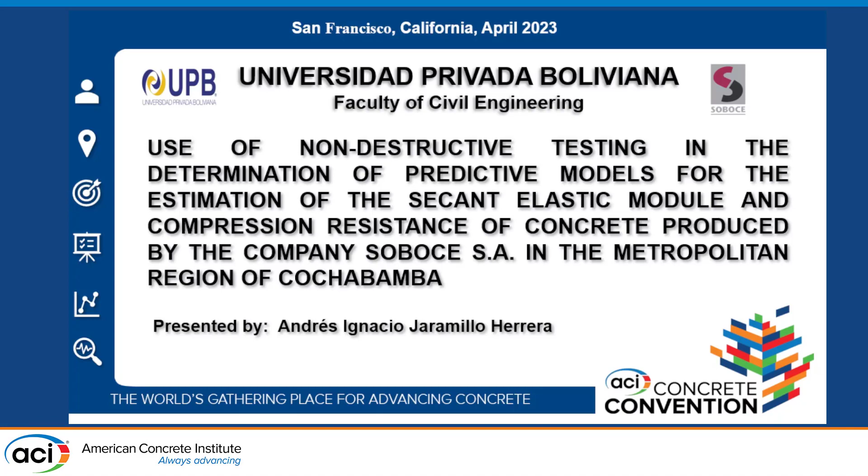Good morning, everyone, and welcome to the presentation of use of non-destructive testing in the determination of predictive models for the estimation of the secant elastic module and compression resistance of concrete produced by the company SOBOCE.SA in the Metropolitan region of Cochabamba. Before continuing, I want to introduce myself to the audience present this day.

My name is Andrés Ignacio Jaramillo Herrera. I was born in a city located in the south of Bolivia called Tarija in 1998. I am currently 24 years old. I am a research student at Bolivian Private University. I am also a technical advisory intern at the company SOBOCE.SA. My main goal as a civil engineer is to get a master's degree in structural engineering. Five qualities I can describe myself with are: I am very positive, disciplined, confident, hardworking, and a fair person.

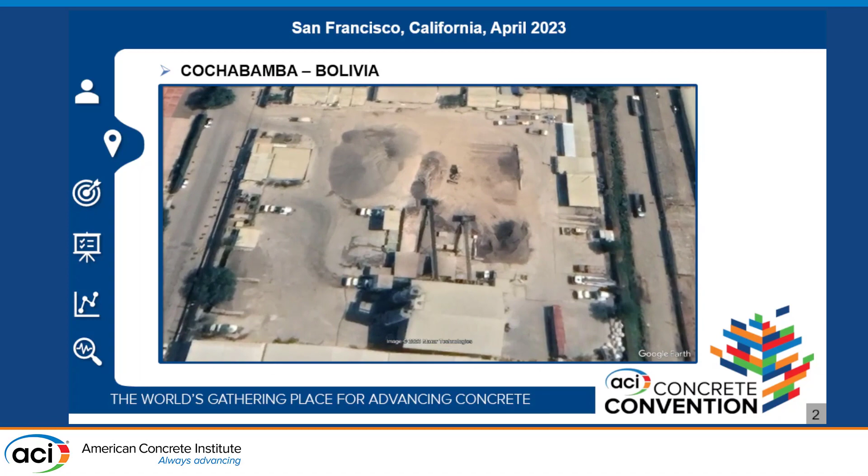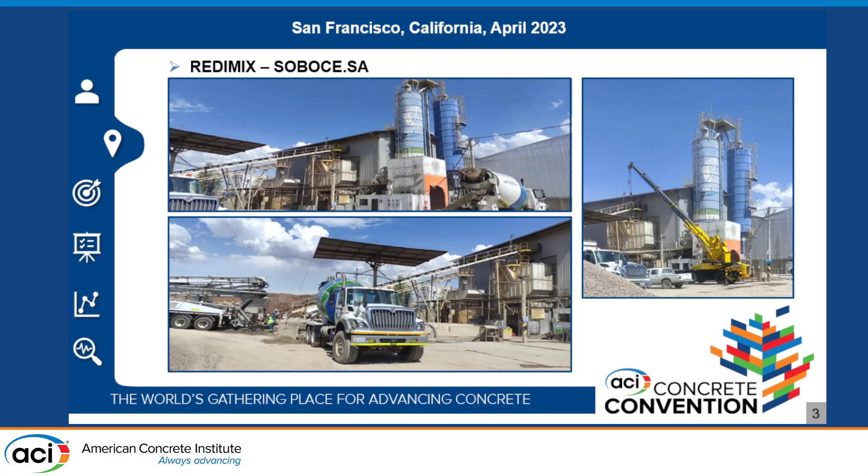The research project was developed in two places in Cochabamba, Bolivia. The first place was in the ready-mix SOBOCE.SA concrete production plant that you can see here. Part of the research was also carried out in Bolivian Private University. Here you have some photographs of the ready-mix SOBOCE.SA concrete production plant and the Bolivian Private University.

The general objective of this research can be presented as: determine regression models that help estimate the secant elastic modulus and compressive strength of concrete produced by the company SOBOCE.SA in the Metropolitan region of Cochabamba, with stone aggregates from alluvial banks of the Parotani River and Viacha brand IP40 cement, through the application of non-destructive testing methods in concrete.

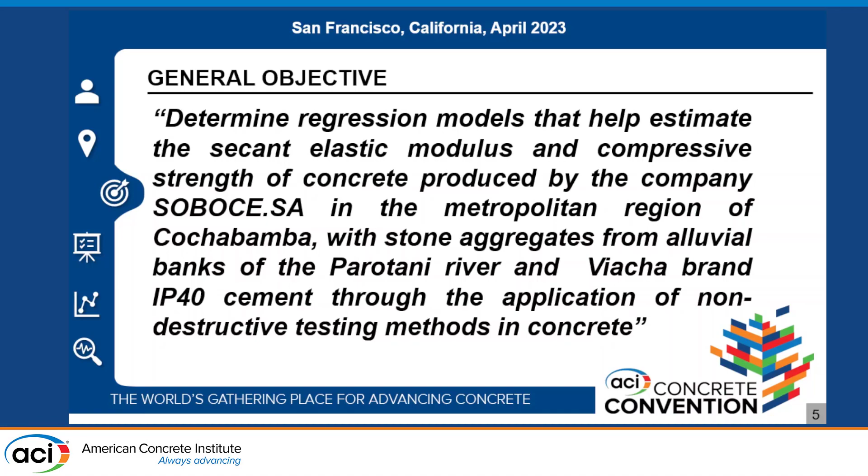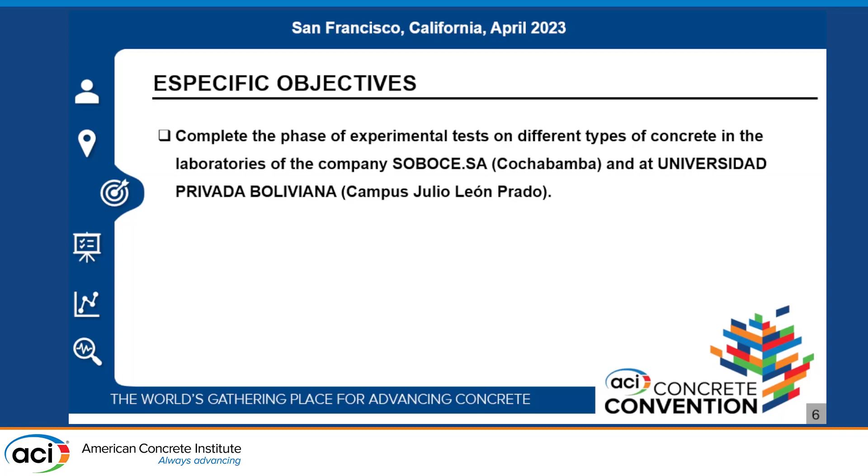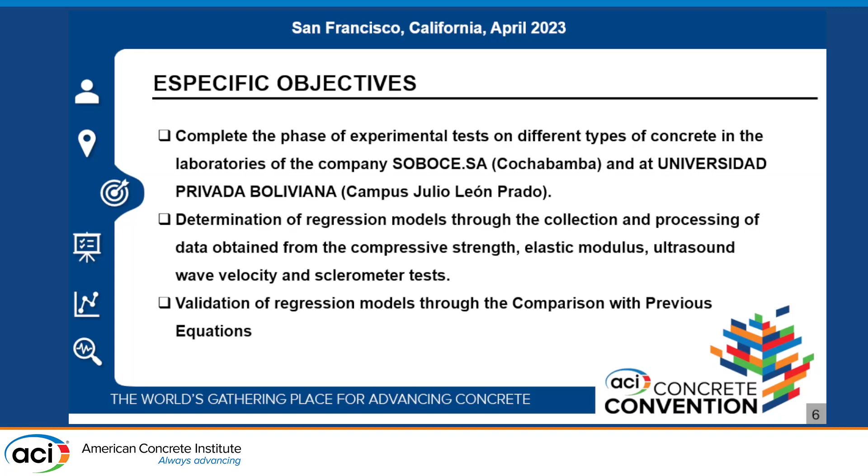The specific objectives can be presented as: complete the phase of experimental tests on different types of concrete in the laboratories of the company SOBOCE.SA Cochabamba and at the Universidad Privada Boliviana; determination of regression models through the collection and processing of data obtained from the compressive strength, elastic modulus, ultrasound wave velocity, and Sclerometer test; and finally, the validation of regression models through comparison with previous equations.

The test methodology implemented consisted first of all in four parts: identification of variables to study, compressive strength, ultrasonic pulse velocity, rebound index hammer, and modulus of elasticity.

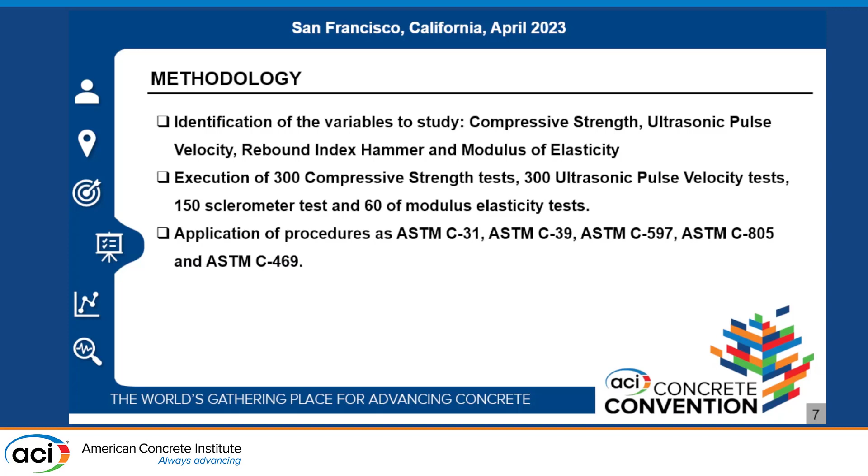Execution of 300 compressive strength tests, 300 ultrasonic pulse velocity tests, 150 Sclerometer tests, and 60 modulus of elasticity tests. Application of procedures such as ASTM C31, ASTM C39, ASTM C597, ASTM C805, and ASTM C469, and the analysis of the effectivity of each model found.

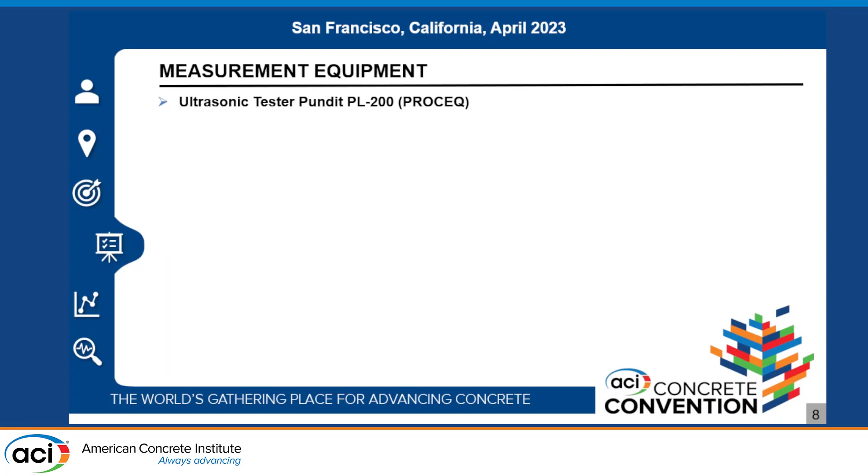The measurement equipment used for reading the ultrasonic pulse wave was the ultrasonic tester Pundit PL200 from Proceq brand, and for reading the Rebound index was the Sclerometer hardness tester Silver Schmidt, also from Proceq brand.

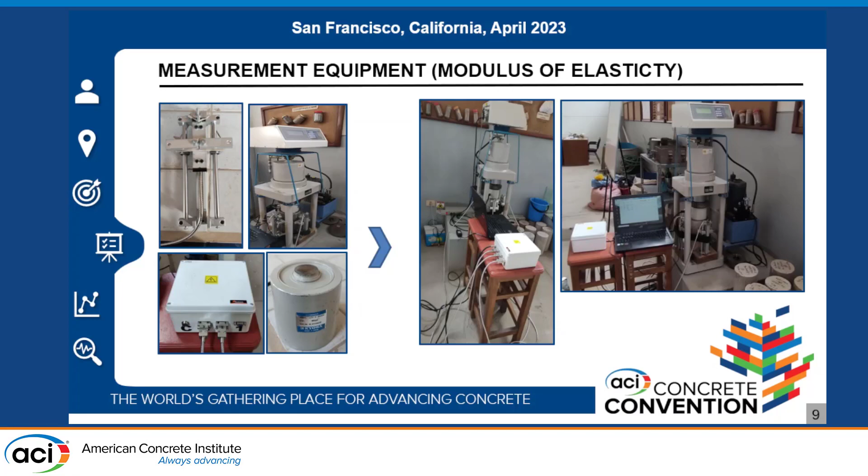Finally, the measurement equipment used for reading the modulus of elasticity consisted first of all in a data logger, three encoders that record the unit strains, and a load cell that was in charge of recording the force applied by the loading press. Here you can see all the equipment ensemble.

The test execution methodology consists first of all in the elaboration of 300 concrete cylinders with dimensions of 15 by 30 centimeters, of concrete mixtures with design resistance from 18 to 35 megapascals reached at 28 days. They were tested from 3 to 90 days. The tests applied were ASTM C31, ASTM C39, ASTM C597, ASTM C805, and ASTM C469.

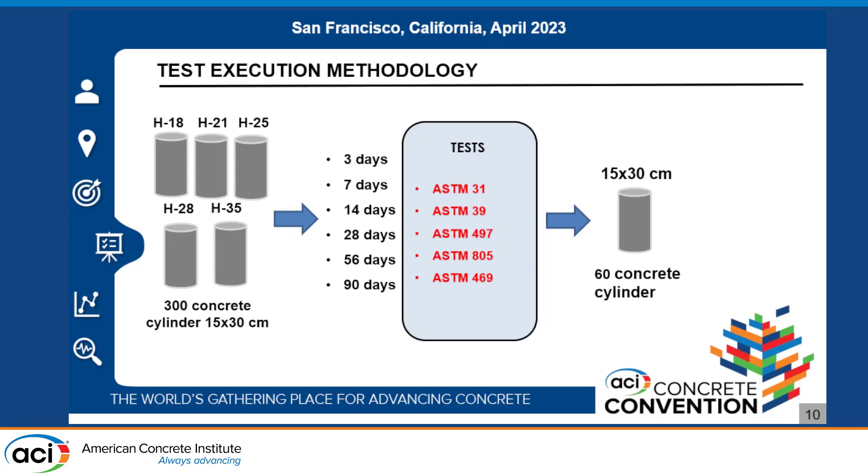In order to study the samples better, all the samples were divided into 5 groups of 60, each group determined by a design resistance, and were tested in subgroups of 10.

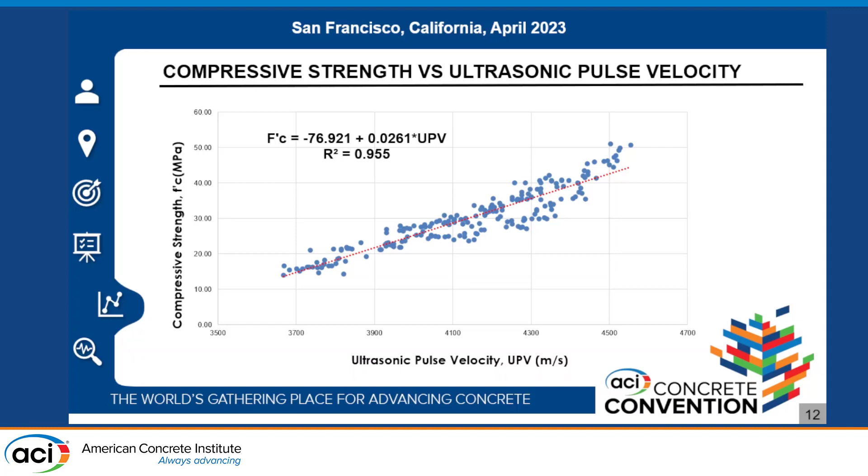In this section of the presentation, we can see the model between the compressive strength and ultrasonic pulse velocity. We can see that it has a very good relationship coefficient of 0.955 and presents a linear form. In the second slide, it can be seen that we also have a linear form, with a very good coefficient of correlation of 0.929.

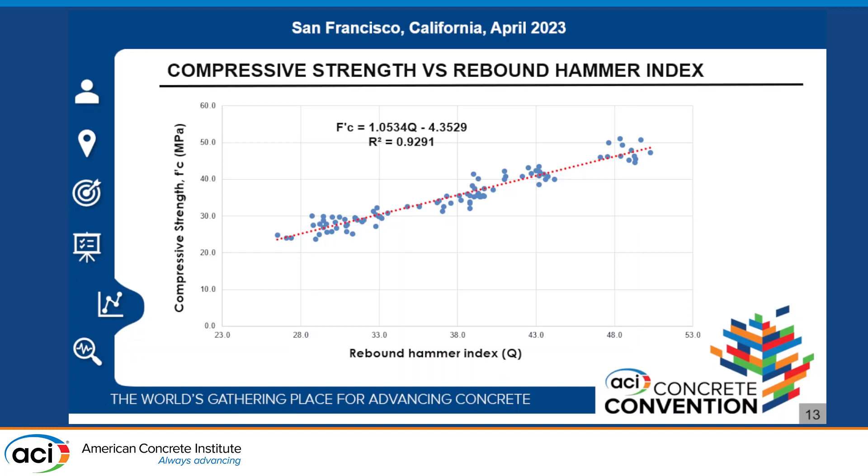Related to the previous model presented, a regression model could be found. This combined the ultrasonic pulse velocity and rebound hammer index, and with these two we can estimate the compressive strength.

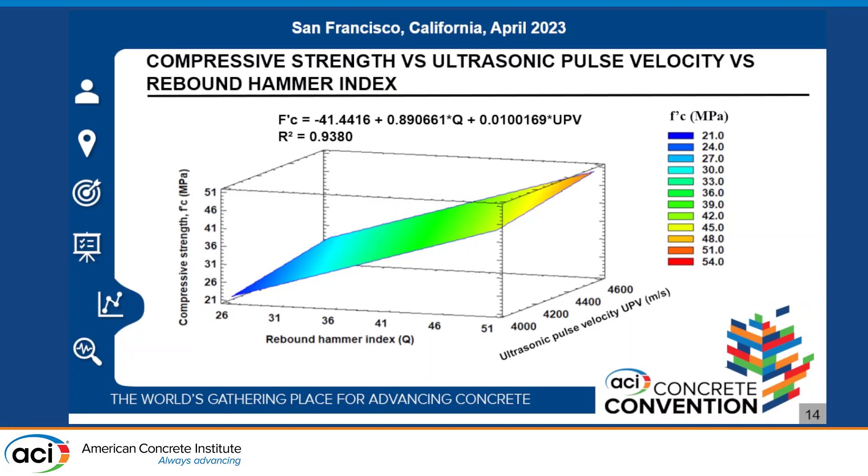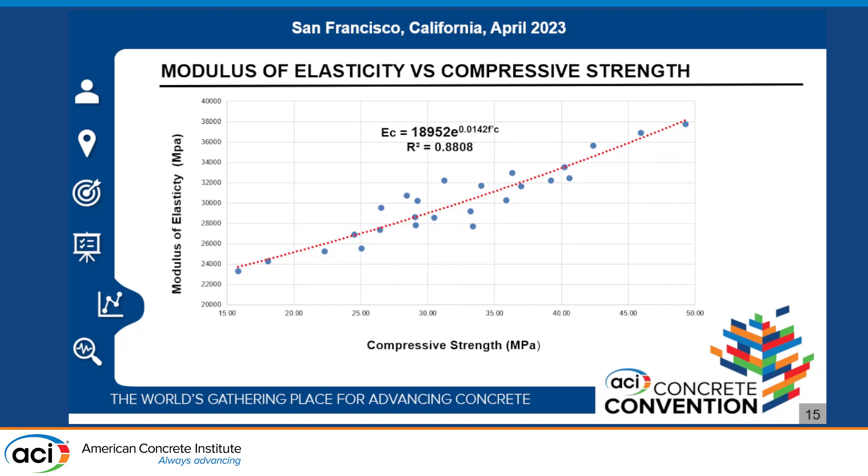In this section, we're going more into the estimation of modulus of elasticity. It was possible to find a classic model between the modulus of elasticity and compressive strength. It presents an exponential form and also has a very good relationship coefficient.

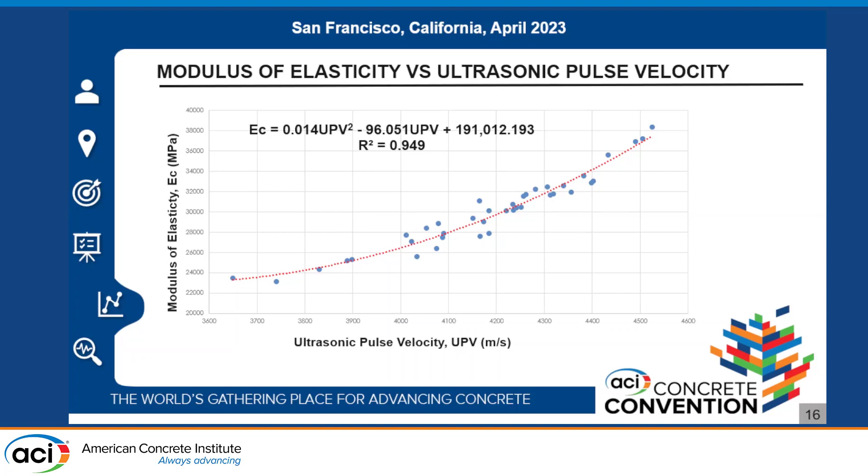In order to validate the regression model presented, a bibliographic search was carried out to look for other similar models developed around the world.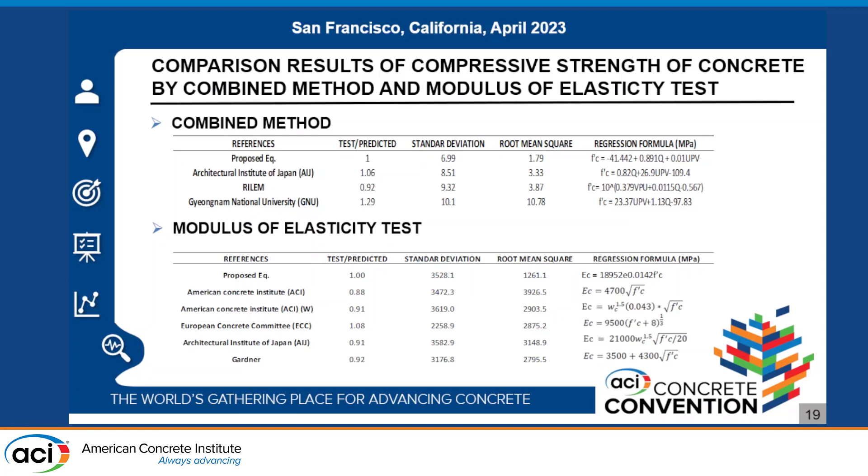In order to analyze and compare the models presented before, the following graphs were prepared, which show us the effectability of each one. Here we can see the prediction ratio of each of the proposed equations and the previously cited models.

For example, in the case of the ultrasonic velocity method, we can see that the model of the Architectural Institute of Japan, the Turgut model and the Kim model have very good prediction ratios, as does the proposed equation.

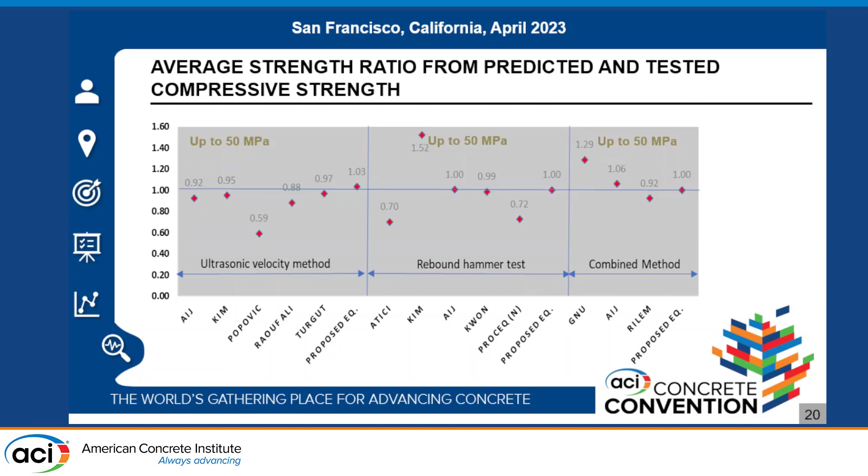Then in the rebound hammer test, we can see in a similar way that they have very good prediction ratios. And in the combined methods, two of them have the major prediction rate, similar to the proposed equation.

In the next graph, we can see the modulus of elasticity. Finally, in the second graph that refers to the elasticity modulus, the proportion obtained from the proposed model and the European Concrete Committee presents a slightly higher proportion than those of the American Concrete Institute.

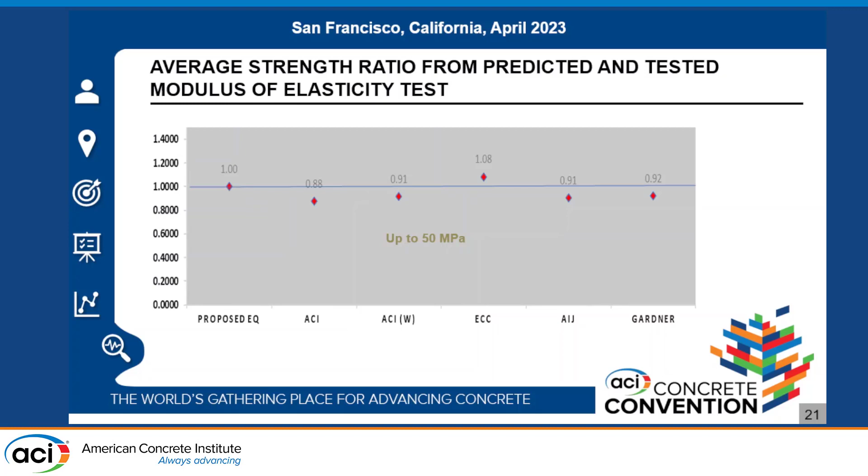Finally, we have reached the following conclusions about this research project. In this study, the proposed estimation equation, which uses a dual regression approach in conjunction with the rebound hammer test and ultrasonic pulse velocity method, shows the highest accuracy and the lowest RMSE in predicting compressive strength.

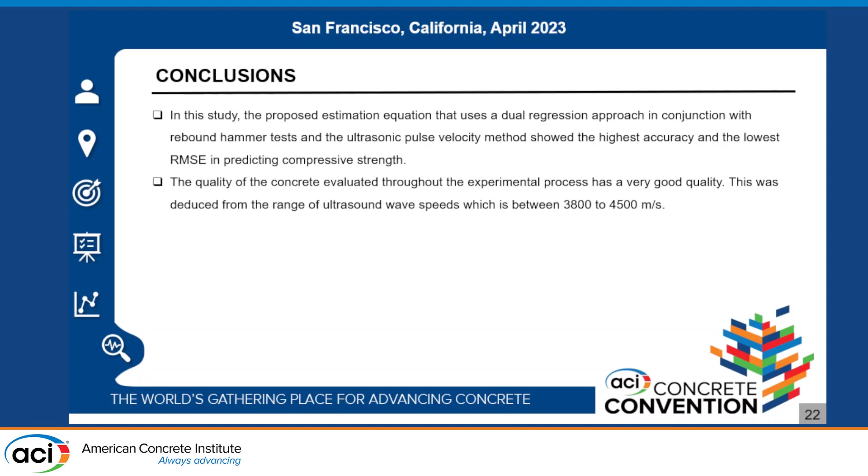The quality of the concrete evaluated through the experimental process is very good. This was deduced from the range of ultrasound wave speed, which is between 3,800 to 4,500 meters per second.

It was concluded that the difference between the values obtained by the models elaborated with respect to other estimation models is due to the composition of cement, the characteristics of aggregates used for the elaboration of concrete, and the model of measurement equipment used.

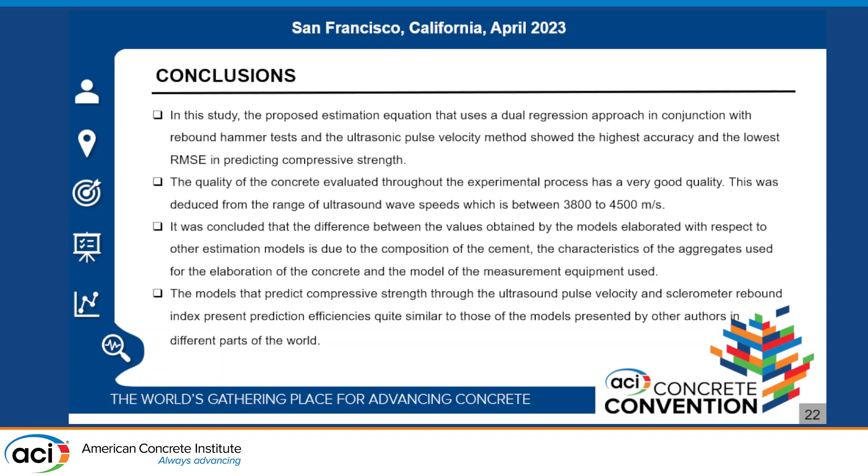The models that predict compressive strength through the ultrasonic pulse velocity and Sclerometer rebound index present prediction efficiency quite similar to those of the models presented by other authors in different parts of the world. Thank you.

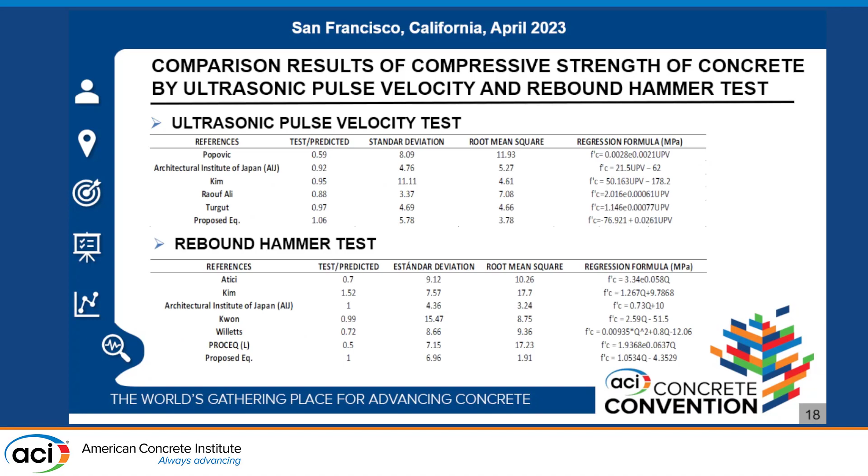Okay. Do you think you could use those same formulas to predict, say, if you used a 50% slag replacement, or if you had fly ash in your mix, or would you need to do different tests?

Well, this equation was found with the purpose of just studying the concrete of the region of Cochabamba, to adapt our circumstance to these models. So I don't think it would be useful to analyze other types of concrete.